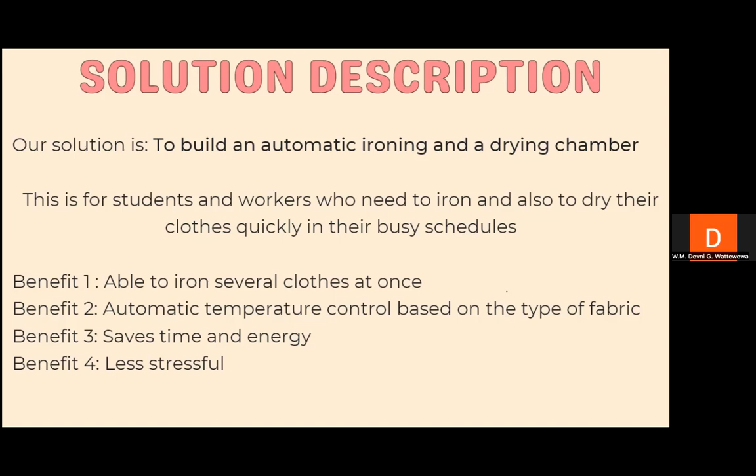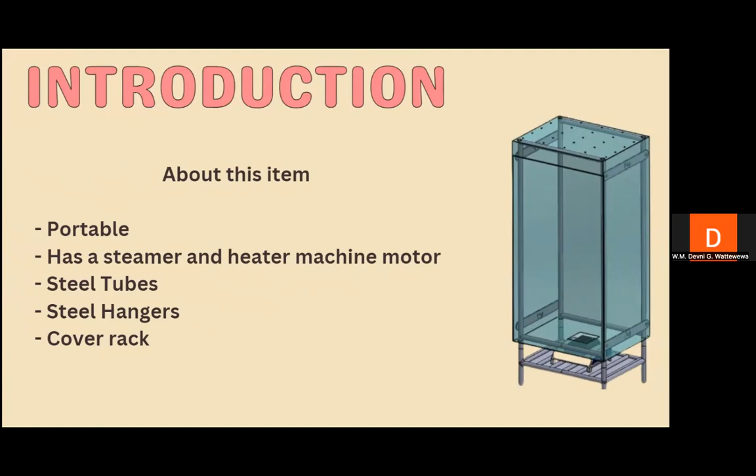I'll start introducing you to our design. First, this is a portable structure where you can move here and there, and it has a steamer and a heating motor machine at the bottom of our apparatus as shown. This is made up of 12 steel tubes. It's cuboid in shape, with steel hangers inside where you can hang the clothes. It's also made up of a cover rack made of Oxford cloth, which is foldable and heat resistant.

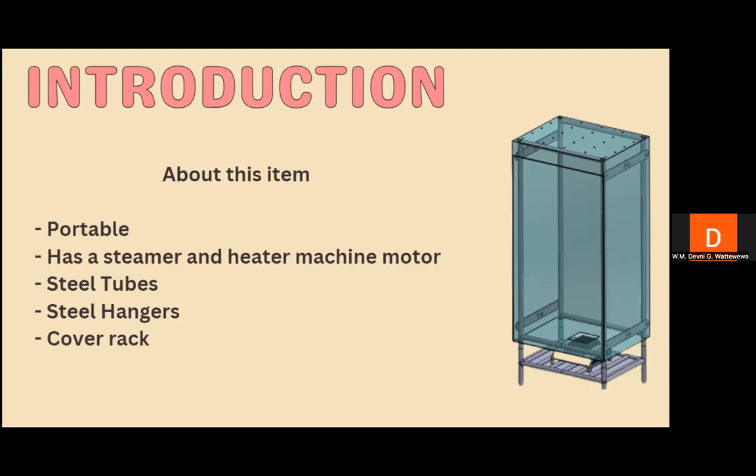Let's start with the features of this prototype. First is the steamer and heater. The prototype that we are making will have steaming and heating technology for both drying wet clothes and ironing clothes.

It has a cover rack which has a steam vapor releaser on top. The steamer and heater machine motor has a port to add water at the bottom of this machine. Basically, this motor has dual function: steaming for ironing and heating for drying. When drying clothes, the steamer won't use water - it will just dry the clothes with hot air through the heating system.

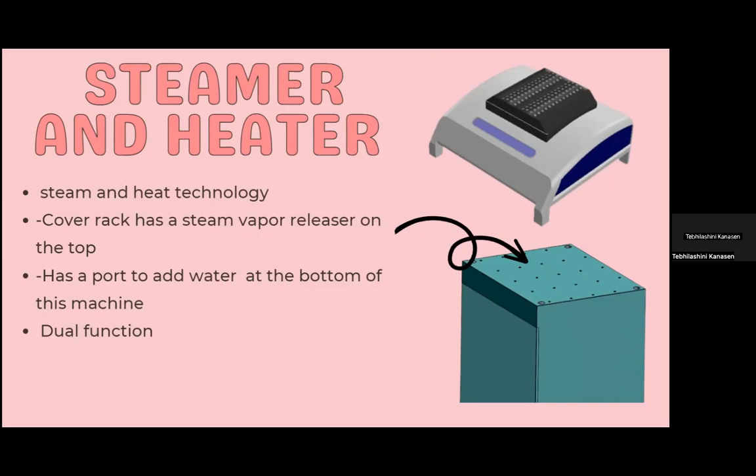Next is the controller. The cycle of drying or ironing can be started or monitored using the controller. This controller will have the key for controlling temperature and the timer. We can control the temperature appropriately based on the fabric, and it also has auto stop power protection to prevent overheating.

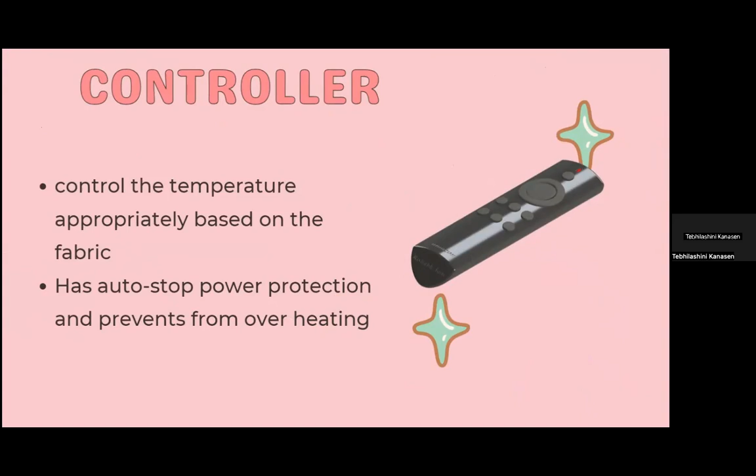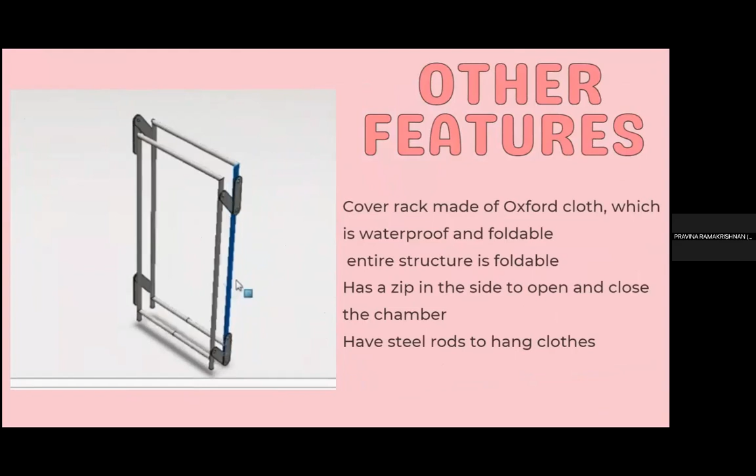These are the other features. It has a cover rack made up of Oxford cloth, which is waterproof and foldable. The entire structure is foldable, so it's easy for moving and storing. It has a zip in the side to open and close the chamber. There is also a steel rod to hang clothes.

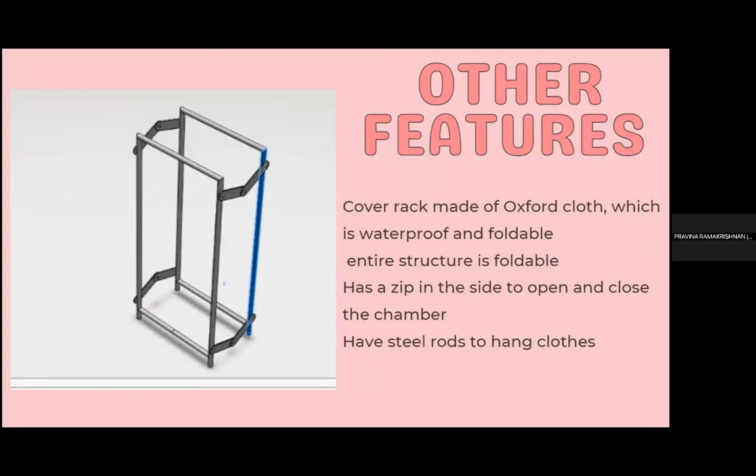This is the assembling process. The product needs to be assembled as shown in the video. First, set all the long rods in position on the base of the structure where you have the steam and hot air machine motor, followed by the sidebars as illustrated. Then the cover rack must be attached from the back of the apparatus, made of Oxford cloth. Lastly, add the front part which has a zip.

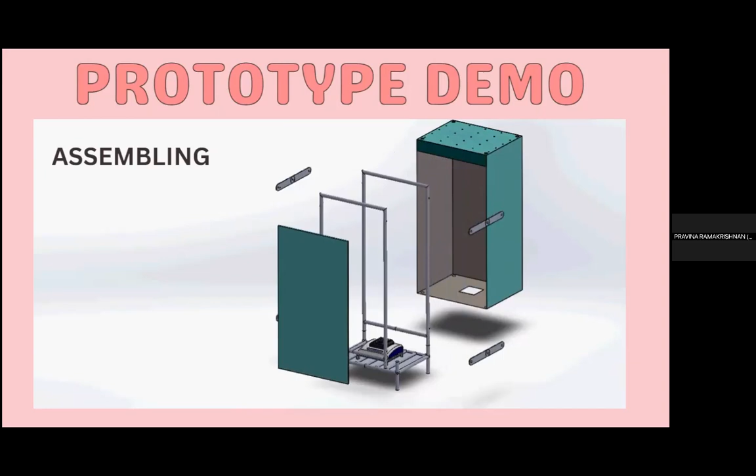This is the functioning process. It has both steam and heating function. Once the structure is assembled, if you want to remove the wrinkles of the clothes, just add some water in the water container. For steaming purposes, turn on the steamer mode and connect it to the power to let the steamer work. Same goes for heating purposes - turn on the heating mode and let the heating work.

Then for drying purposes, the hot air mode will be turned on automatically. Once the clothes are done, there will be an alarm sound heard. Additionally, as mentioned earlier, the temperature and time can be controlled by the controller.

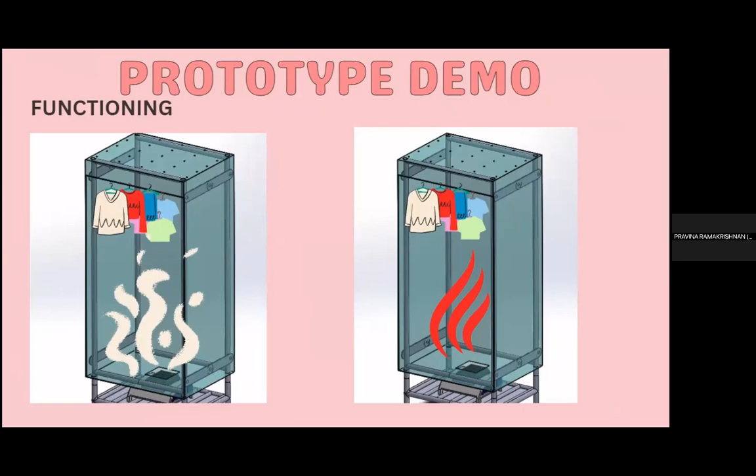To sum up all the features, we have the steamer or heating motor machine at the bottom of the design, which has steaming and heating technology for both drying wet clothes and ironing clothes. At the top of the cover rack, you have a porous surface which releases the steam outside, and at the bottom, you have a port to add water.

When drying clothes, the steamer won't use water - it will just dry the clothes with hot air produced by the steam heating motor. We mentioned the Oxford cloth before, which makes the cover rack surrounding the steel rods. This design is portable, as we highlighted, because it weighs around 4.2 kilograms, and the dimensions are around 148 centimeters in height, 50 centimeters in breadth, and 70 centimeters in width.

Additionally, you get a controller to control the temperature appropriately based on the fabric, and it also has auto stop power protection, which prevents overheating.